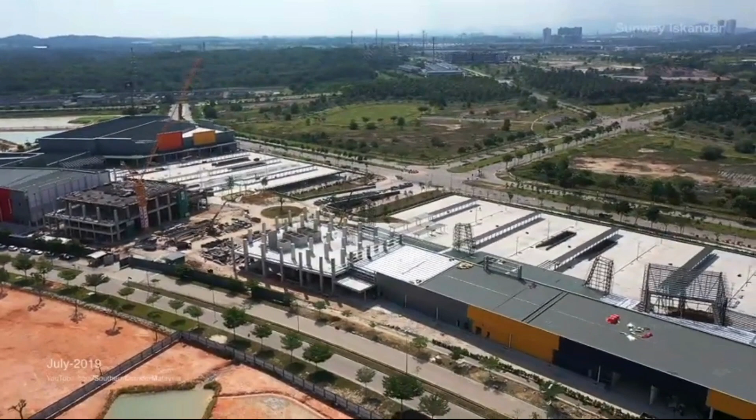Other than that, the pedestrian walkway was completely damaged except for the ones around the Sunway Big Box. This issue did not secure the safety of the pedestrians around the site. Last but not least, I couldn't help but notice there were no resting areas for the pedestrians and bikers to cool off and do some activities.

The client for this project is CIPD, the Centre for Planning and Development, which is one of the 5 research centres under the Research Institute for Sustainable Environment (RISE). The centres were created to gain a vibrant, innovative and productive research culture, apart from maintaining the status of a research university.

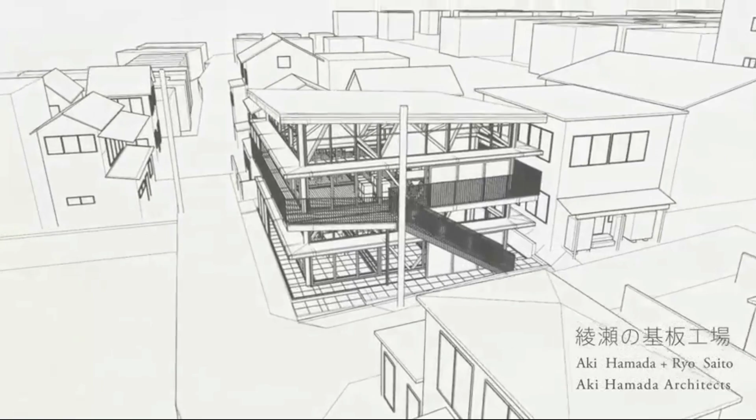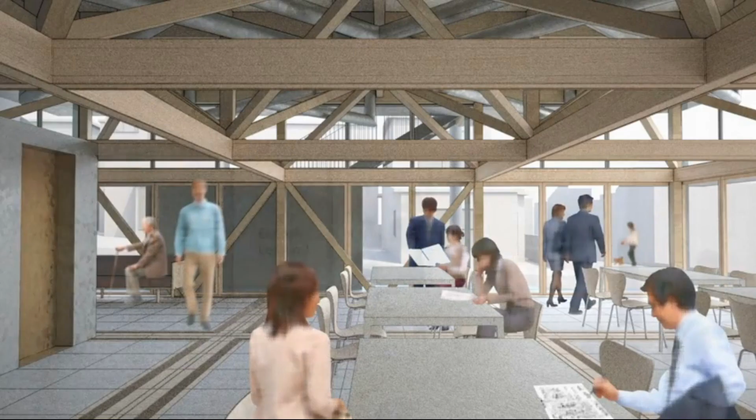There are a few precedent studies included in this project. The first is Substrate Factory Ayase in Japan by Aki Hamada Architects. I like the concept and system of multipurpose spaces that exhibit to users which function of the space accordingly with the situation. On the other hand, the external skin allows the penetration of daylight into the building through the voids. The inner partition fits into the horizontal beam well as a divider.

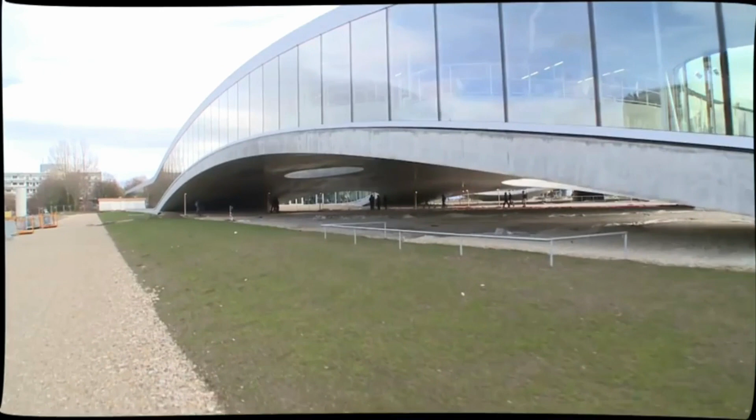Last but not least, the Rolex Learning Center in Switzerland by SANAA Architects. To me, the most interesting feature in this building is the glazed voids connecting the indoors with the social open spaces. These courtyards also naturally ventilate the interior spaces. The series of undulations create semi-open spaces below on the ground floor, encouraging the multi-use of semi-open and open spaces.

After gathering information from the precedent studies, I was inspired to come up with a concept. Based on the studies, I could see how architects are pursuing new horizons in design, chasing algorithms and experimenting with adaptability. I also noticed that sustainable elements prioritize the importance of indoor environmental quality for affecting how an individual feels in a space, which brought to me the word retrofitting.

Retrofitting is the addition of new technology or features to older systems, such as improving existing buildings with energy efficiency equipment. So my concept is to explore beyond the limits, which brings to beyond retrofitting. This concept was inspired by the combination of two elements I noticed in the studies: technology and sustainability. Therefore, suppressing the existing impediment between natural environment and architecture is my main objective in this project.

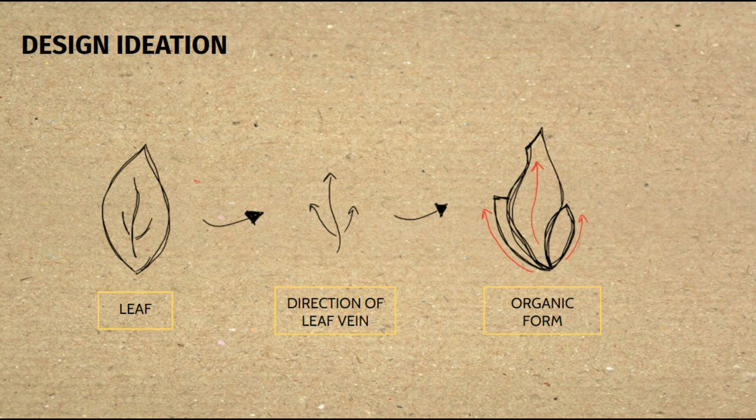The form of my building was originally inspired by a leaf, which symbolizes environmental friendliness. Usually, a leaf has veins that spread into different directions but still from the same core, which explains the different form of my floor plan. This has been an inspiration to my development of form making.

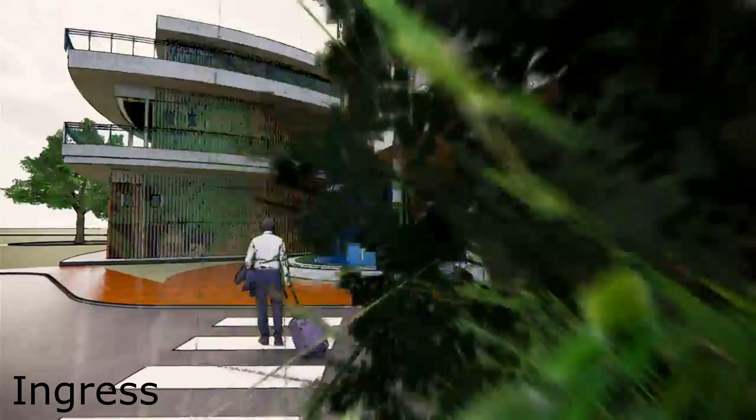Last, I will explain the interaction of main spaces within my building to have a better understanding of its circulation. The ingress of the site is located here because it is near the parking space suggested in the master plan.

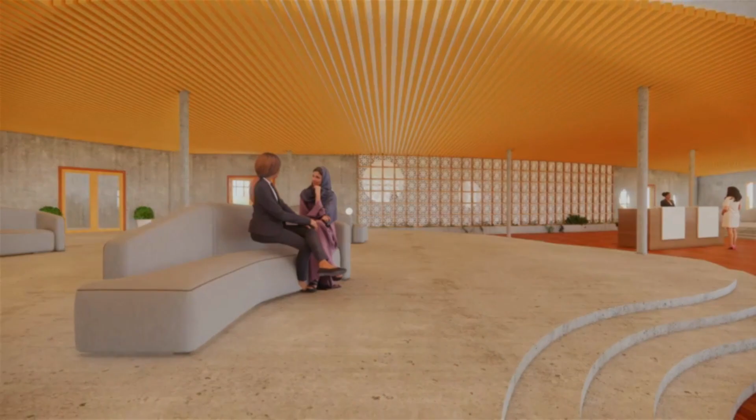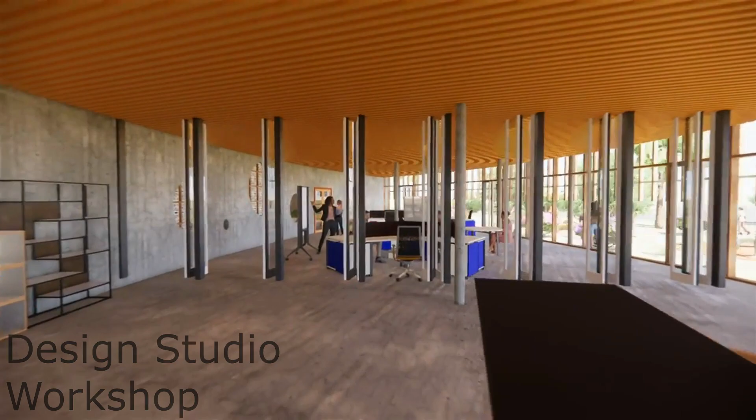The service lane is located here, which is more private and covered. The lobby is connected with the reception area and multipurpose area. The pattern curtain wall was added to fulfill the client's need. Users are also able to publicly hang out and chat in the leisure area. The design studio and workshop are connected with each other, only separated by a retractable wall. The spaces can also function as an exhibition room depending on the situation.

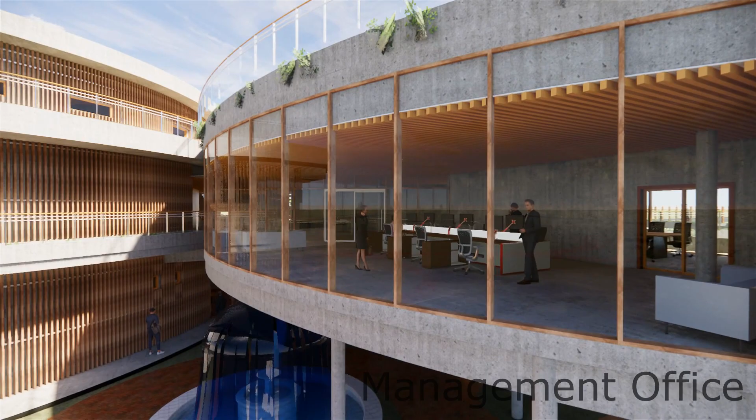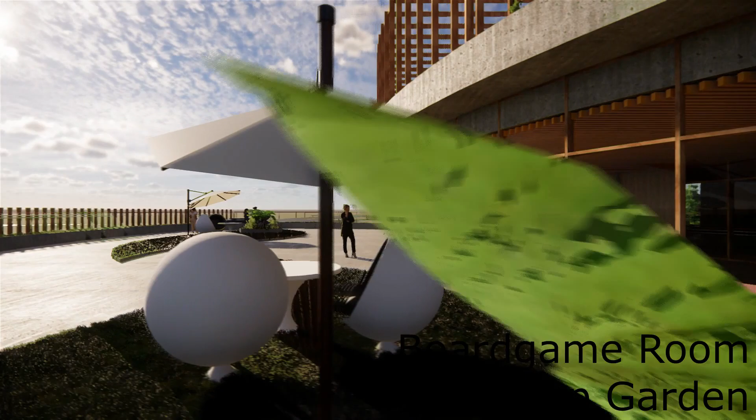Moving on to the first floor, the management offices were located around the same area in order to ease the system of managing the building. The first floor plan is a bit private, considering the staff and management work there. There are some areas provided for the staff to relax during breaks, such as the board game room and the rooftop garden whenever they need some fresh air.

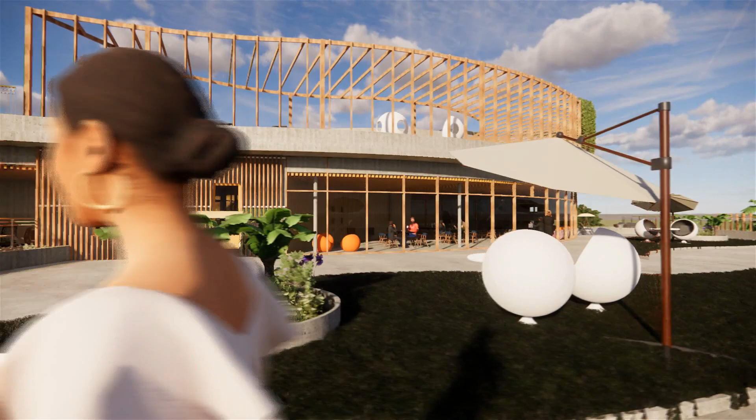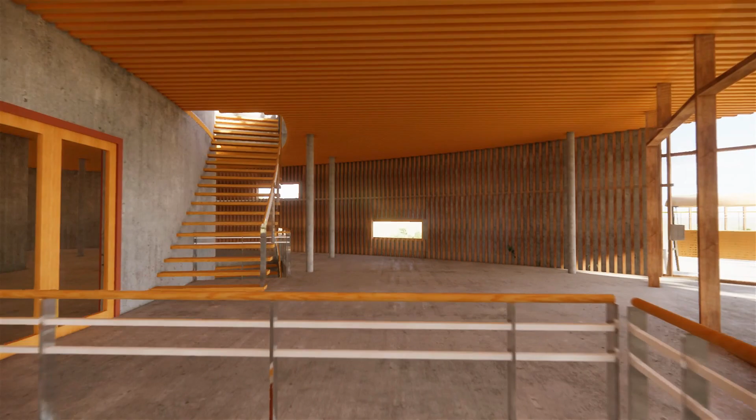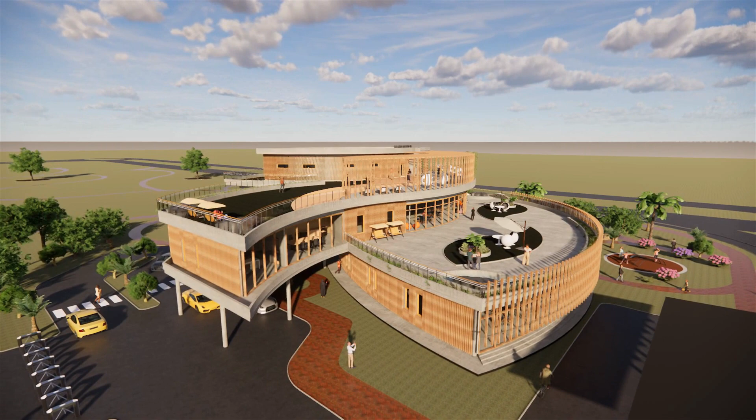On the second floor, a solar simulator and environmental laboratory was provided for the exploration of environmental studies. This area is a bit more private compared to before, as it is more for research studies. There is a spacious rooftop garden on the outside that can occasionally be used for events such as annual company gatherings or other private companies' events. The researchers can also hang out and relax there during their break time on a daily basis.

I think that is all from me. Here is an animation of my 3D model. Thank you for lending your ears. Enjoy the video.